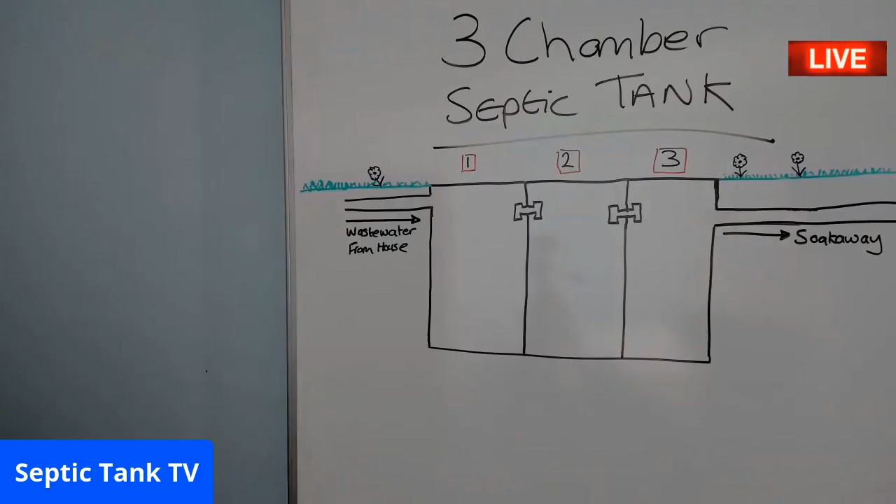Today I'm going to answer the question: what is a 3-chamber septic tank, and how does a 3-chamber septic tank work? This is one of the most popular questions that I get asked live on Twitter, Facebook and YouTube, so I'm going to answer that question tonight.

Let's start by answering the first question: what is a 3-chamber septic tank? Well, basically, it's a tank with 1, 2, 3 chambers in it. Seriously. You can also get a 2-chamber septic tank, but that's what a 3-chamber septic tank is.

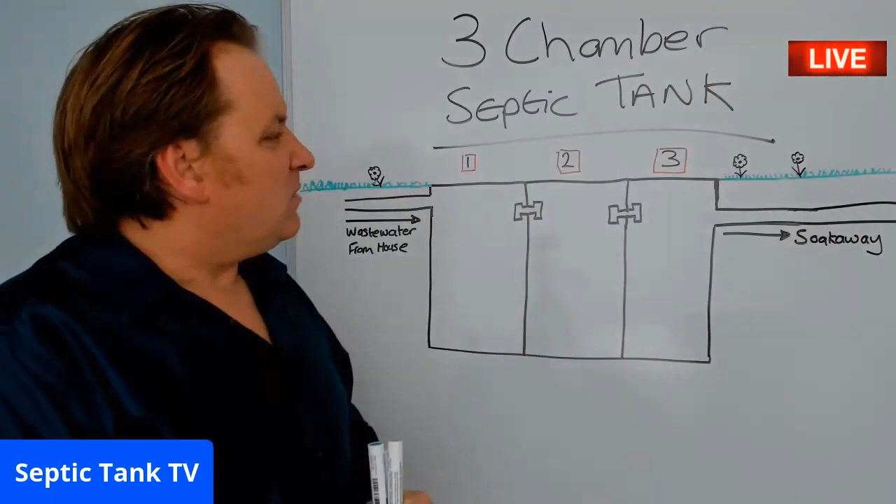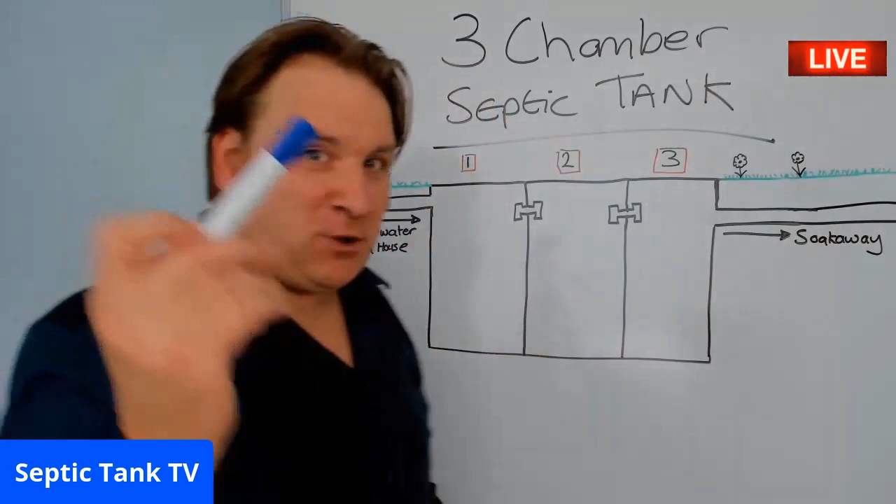So why would anyone make a septic tank with 3 chambers? Why? I'm going to show you. All right, let me get my blue pen here. So you've got an inlet pipe and you've got an outlet pipe.

This inlet pipe here is the wastewater from your house. So let's say you've got a house. Wastewater - what I mean by wastewater is your bath water, your dishwasher water, your shower water, your bidet water, your toilet water - that's all your water, all your waste, comes in.

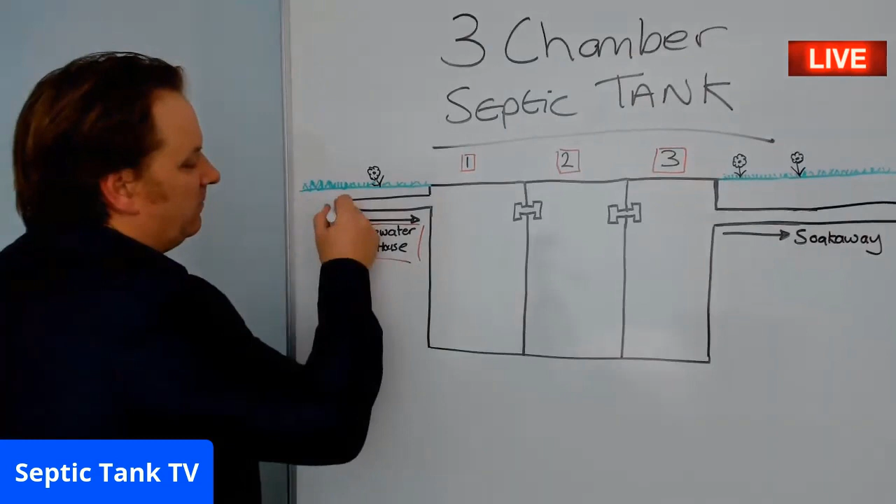Oh, where's my blue pen gone? All your wastewater comes in here. Look, okay, so you've had a bath - this is where it comes in, into here.

Okay, so what happens is this: all your wastewater will fill up to here. So all the wastewater will fill up, look, chamber number 1. Now, in wastewater, there's lots of debris.

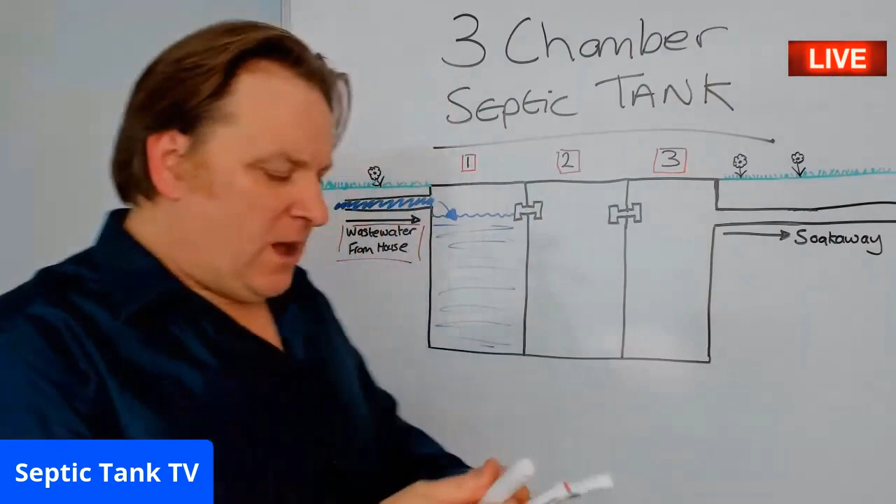Where's my other pen gone? There's lots of debris in wastewater. When I mean debris, I mean things like hair, nails, skin, teeth, fat, grease, sludge, and vegetables such as potato peelings, carrot peelings, stuff like that.

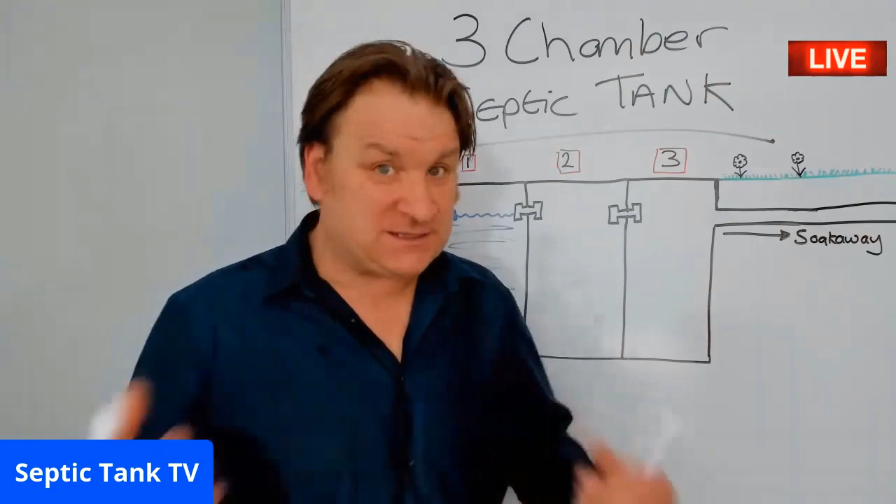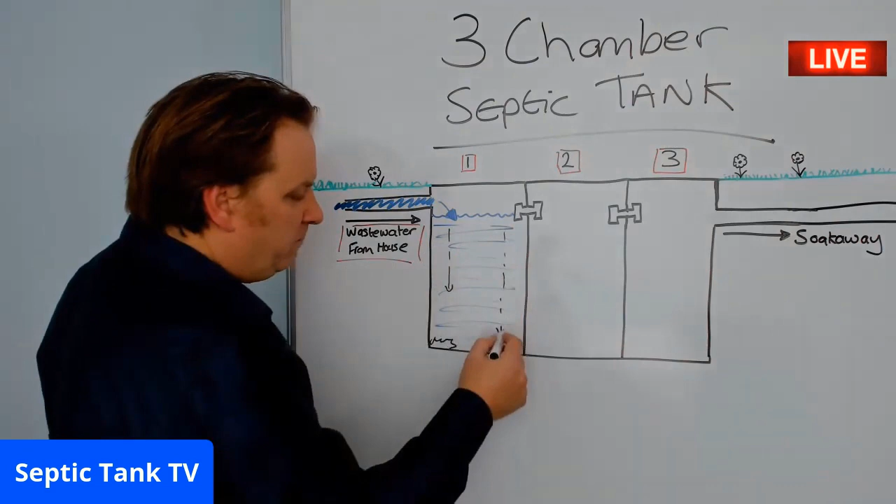So all this debris will float, starts floating on the top, but then it falls all the way down. So the debris falls down to the bottom of the first chamber, and that debris will build up on the floor of your septic tank in chamber 1.

All right, that's pretty easy, isn't it? Now, that debris there, as I said, is made up of fat, grease, sludge and other kind of poo, horrible, smelly stuff. But not only that - that's the heavy stuff that's fallen to the bottom.

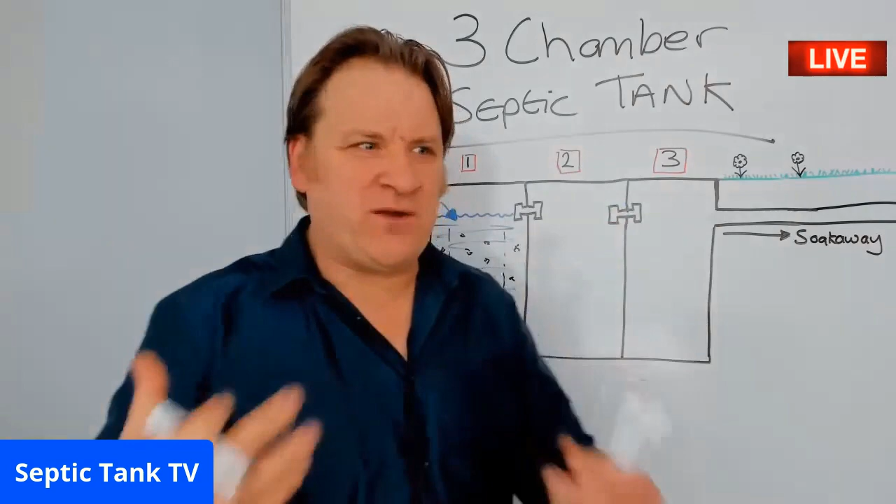The other debris will float in the water, like so. Now that debris floating in the water is called suspended solids, because they just float around. I suppose if you wanted to liken it to something, they're like jellyfish.

And then you'll get other debris that will float on top of the water. So basically you've got 3 stages: stuff that floats on the water, stuff that floats in the water, and stuff that falls to the bottom of the tank.

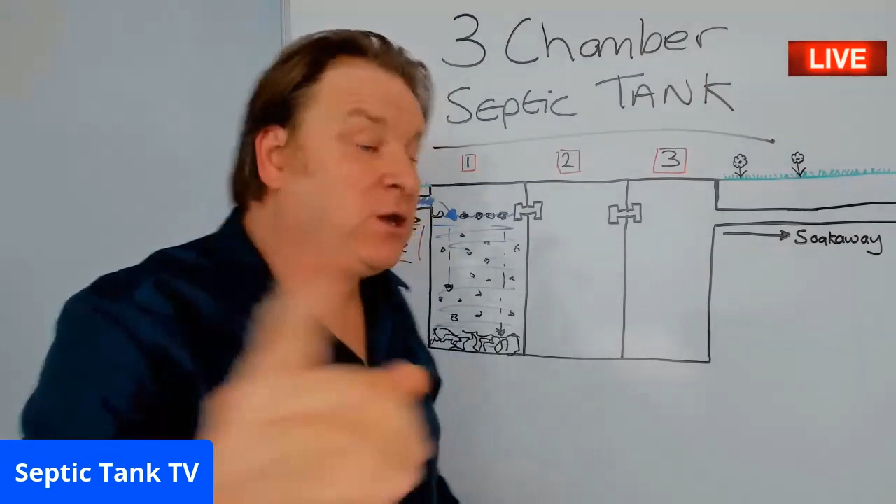So why is that important? Because of this - you see this thing here? Now this is called a baffle. Basically what it allows is this: all the water comes into here, it fills up, then you see that tide line there, then the water from here will then go into this secondary chamber and fill this secondary chamber up.

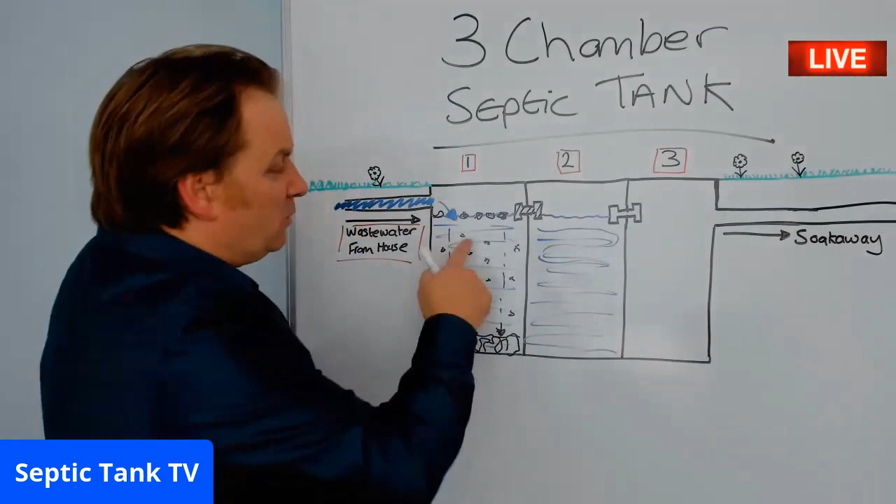Now, the reason for the second chamber is this. Most of the debris is trapped in the first chamber. These little baffles stop big clumps and lumps of poo and fat and grease and sludge and potato peelings and hair. They stop the majority of it going into the second chamber.

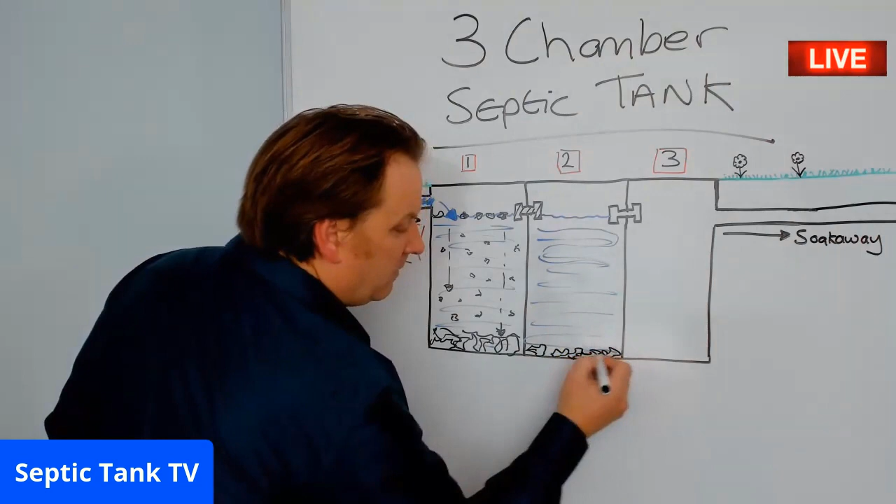So in this chamber, you'll still have debris go in there, and some will fall to the bottom still, but there won't be as much as in the first chamber. So imagine that's the sediment in the first chamber - in the second chamber, it will probably only be to here. And the suspended solids will be a lot less in the water.

And you'll still have debris that floats on the surface, but it'll be smaller and there'll be a lot less of it. That's the whole point of chamber 2. Can you get the principle here? What it's actually acting like is a filter. So the more chambers you've got, the more you clean the sewage effluent before it ends up going to the soakaway, which we'll talk about in a moment.

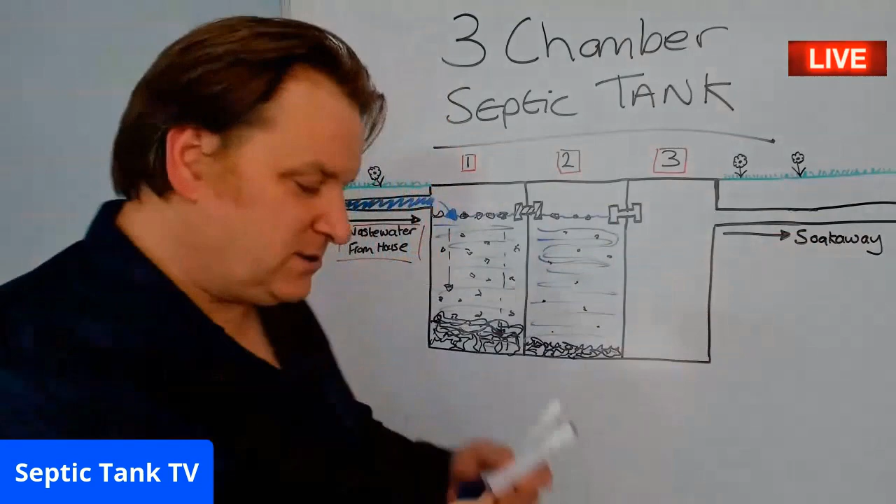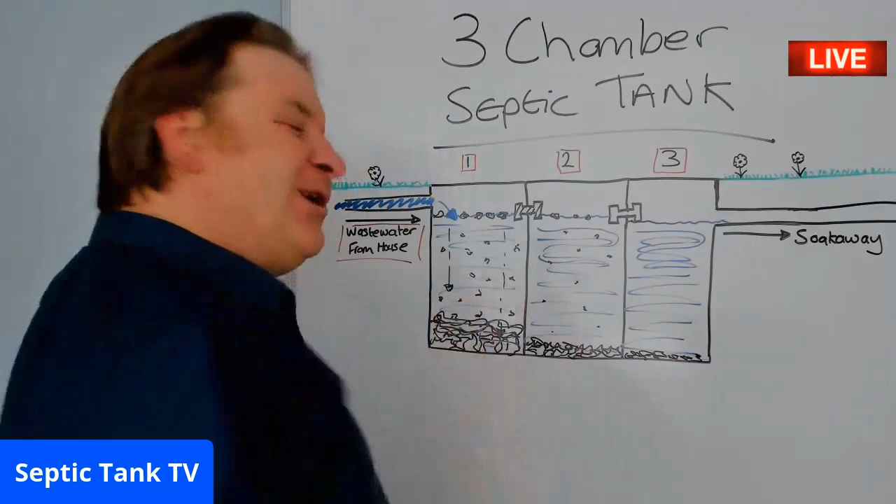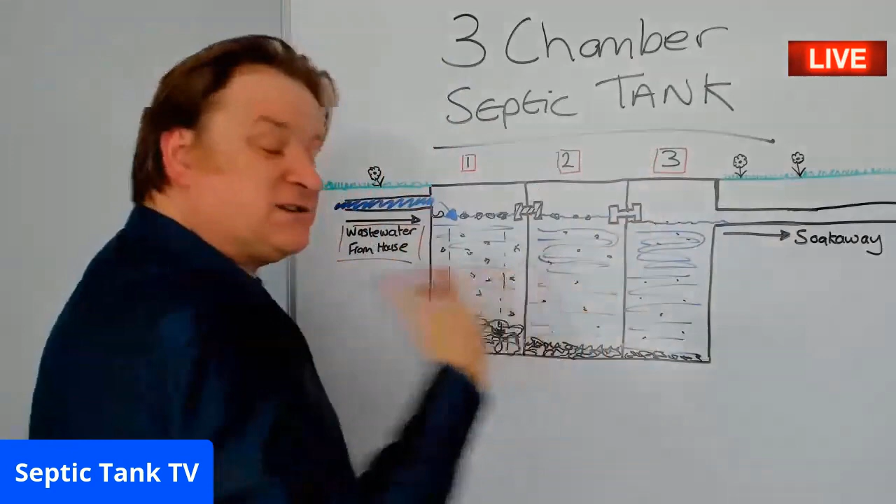So then in chamber 3, you'll have water - it goes in, it steps down, and again this will be full of water here. This is the last chamber. Now in the last chamber, you'll still get some debris that makes its way through, but it'll be a lot less than chamber 2. And you'll still get a bit of suspended solids in the water, but it's a lot less. And you will get a tiny bit of debris floating there, but as you can see, it's been filtered and screened a lot more than when it first went into the tank.

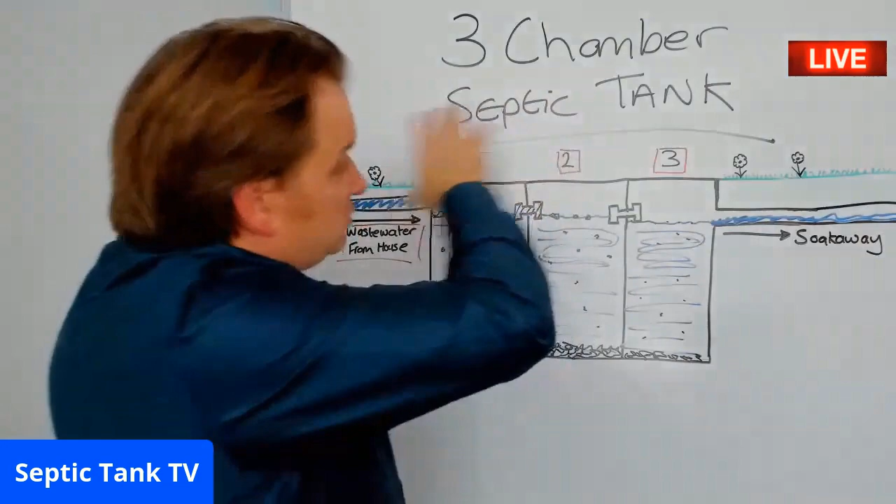And then from there, the water will make its way to your soakaway. Now, a soakaway is either a soakaway pit or it's a herringbone system, drain field, leach field, whatever you want to call it. But the point being, that is what a 3-chamber septic tank does. That's what it's designed to do.

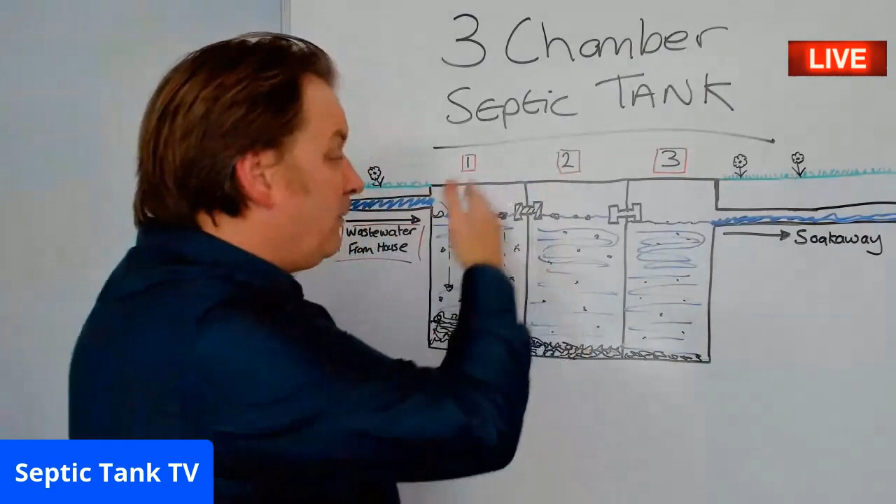Some people only have 2 chambers, so the liquid, suspended solids and debris in the second tank will be a lot less than the first, but it's not as effective as a 3-chamber septic tank. Now, I don't think I've ever seen a 4 or 5-chamber septic tank. I may have seen a 4-chamber one once, but they're really, really rare.

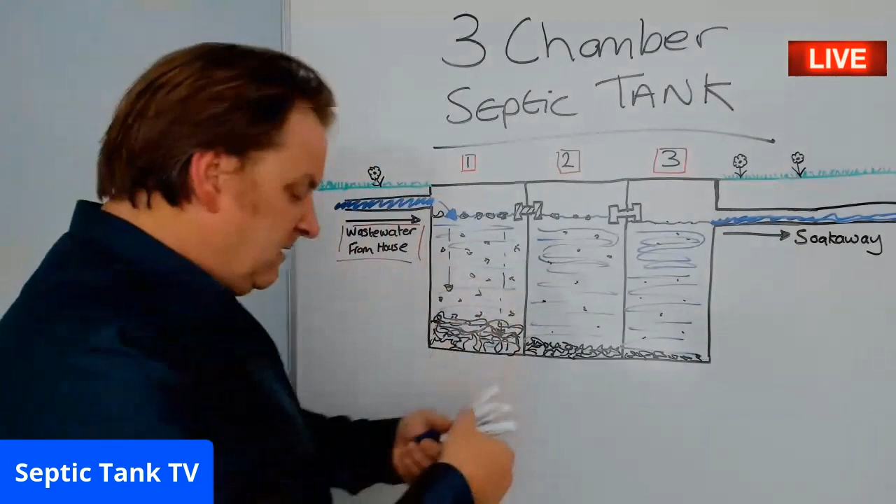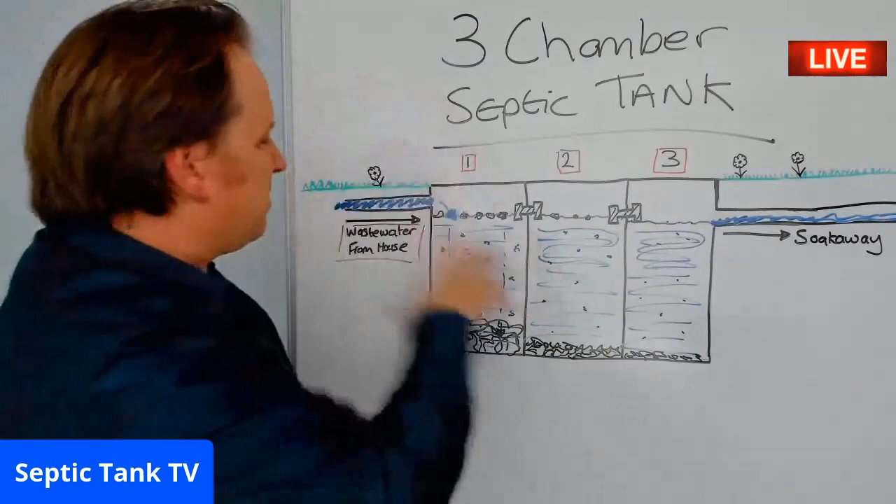But if you're looking to construct a septic tank, these don't really exist now. Up until about 20 years ago, people would have dug a hole and made their own 3-chamber septic tank from concrete or breeze blocks, but people don't make them anymore. Even the septic tanks you buy now, the plastic ones, they still are not as effective as a 3-chamber septic tank. So there you go, I hope that's answered your question.

Yeah, so that's why they're called a 3-chamber septic tank, and that's what they do.